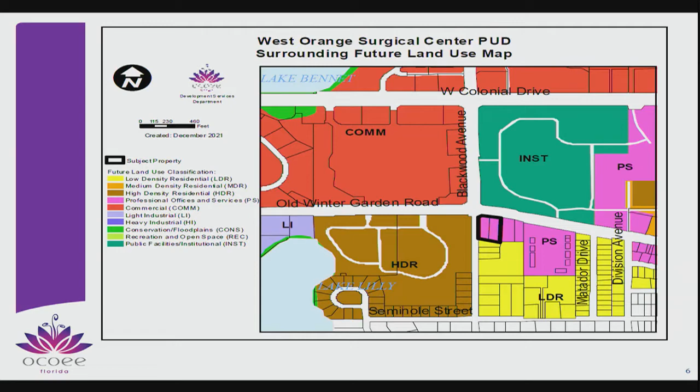In their land use plan, they're asking for a 15-foot building setback from Old Winter Garden Road, 10-foot building setback from Blackwood, 10-foot on the side, the east side, which they meet, and 25 in the rear, the south side. In terms of parking ratios, the requirement for medical is 1 per 100; they're asking for a little bit above that. Staff is supporting 1 per 250 square feet to mirror what was previously approved in the site to the immediate east.

Stormwater is being provided through a combination of surface retention as well as an exfiltration system currently being engineered. Landscaping will be provided along Old Winter Garden and Blackwood, the two fronts. On the south side for the residential, the comp plan requires a minor landscape buffer, essentially 10 feet plus landscaping and a wall or fencing. On the east side, I'll go into more detail in just a moment.

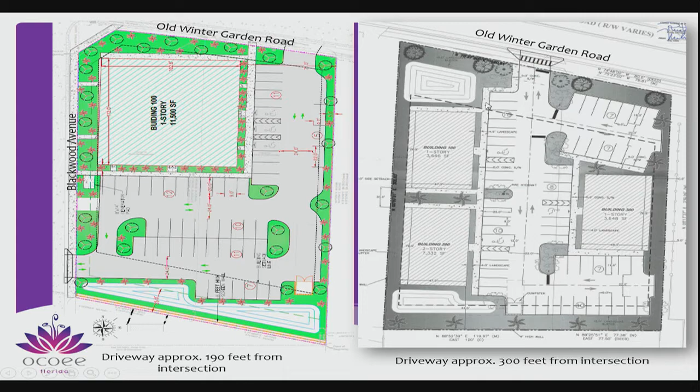Since the December 7th DRC meeting, I have to give my appreciation to both applicants for meeting with each other and talking over the past couple of weeks to come up with this concept plan, which hasn't been formally submitted as a revision but is in draft form that they've sent to us. The surgery center, this applicant, has agreed to modify their connection on the south, so there's a driveway connection here on the north and on the south. They will have full access off of Blackwood, and the two sites will have a shared driveway access off of Old Winter Garden. So the two sites combined are continuing to place the driveway connection, which is a right-in right-out because of an existing median, as far away from the intersection as possible to improve safety.

So the only other outstanding issues are really to finalize the cross-access easement, which they can do closer to final engineering, and then working out the sewer flows and connections with the utilities department.

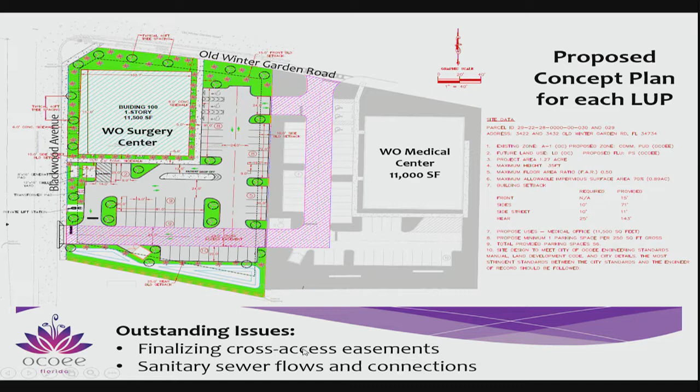So with the improvements that they've done to their site and land use plan, staff is recommending approval of the annexation and the rezoning from County A1 to City PUD for the properties located at 3422 and 3432 Old Winter Garden Road, subject to the two conditions again: developing a coordinated plan for access and circulation, and the resolution of all the outstanding utilities issues. With that, the applicant and the engineer are here to represent the project. If you have any questions of me or them, thank you.

Would the applicant want to come up here? No? Okay, does anybody here have any questions for the staff?

Just so I'm clear, because I think I may have either misread or misunderstood you, I've got a conflict. So the property to the east is another owner separate altogether. Are they going to come later and make the changes they're proposing, or are we doing that all in one? It's because two being separate is confusing to me. Two separate applicants, two separate projects, two separate owners.

It's just that the owners of the properties to the immediate east are coming to staff with a request for amending their land use plan that was already approved as well. So they're kind of coming in almost simultaneously with each other. We've been in conversations, we've had pre-application meetings with the properties to the immediate east. This property had a pre-application, and now they've actually submitted for their first round of reviews. We are anticipating the applicants for the property to the east, the existing medical center, to submit their application in the next week or so.

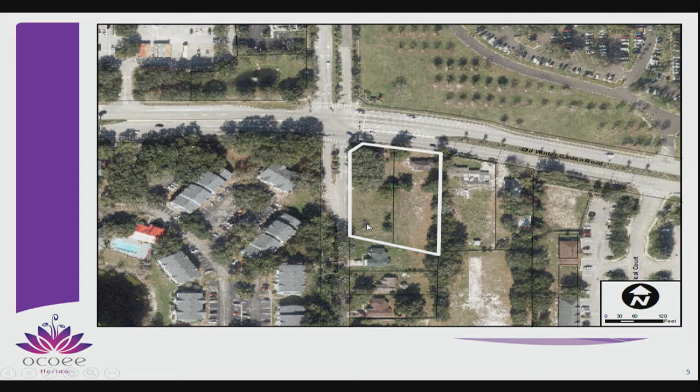Is this only going to be a landscape separation between the medical center and that house, or is there going to be like a fence? The comp plan requires a minor buffer, which is 10 feet, that's landscape plus wall or fence. So they could do wall or fence.

Are the separate parties, separate owners, related parties? I don't think so. Are the two owners related? I don't think so, no.

Any more questions for staff?

All right, with that being said, this is a public hearing. If there's anyone here who would like to speak about this item, here's your chance. Seeing none, I'm going to go ahead and close public comment, and two motions are going to be necessary.

Can I have a motion to either recommend or deny approval of annexation, please? So, Mr. Chair, I move that we recommend approval of the annexation AX 102122. Do I have a second? I'll second that. And then call the vote. Aye. All opposed? Motion passes.

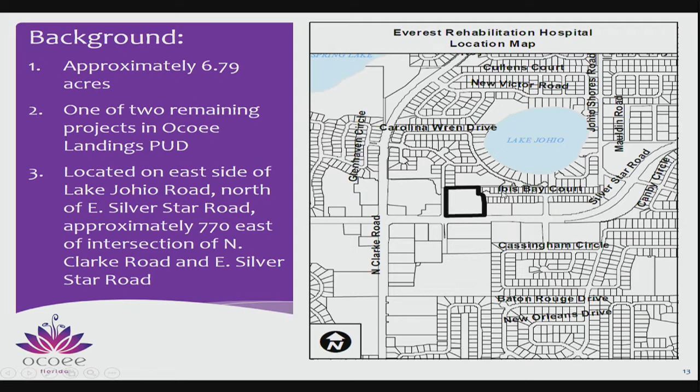You can see the single-family subdivision is totally built out, all 50 single-family homes. You have the Publix shopping center, Willows on the Lake. They have a gated access on this road, and you have Burger King and Citrus Elementary School across the road. This is the Dollar General, at the intersection to the subdivision and the intersection with Silver Bend.

As part of the construction of the single-family homes, DOT made them close an open median full access median, so it's direct lefts only. That was what they termed a short-term improvement, at such time they thought a signal would be warranted sometime in the near future. So at some point there'll be a signal at the Silver Bend entrance, just to the east from here. The property is all zoned commercial.

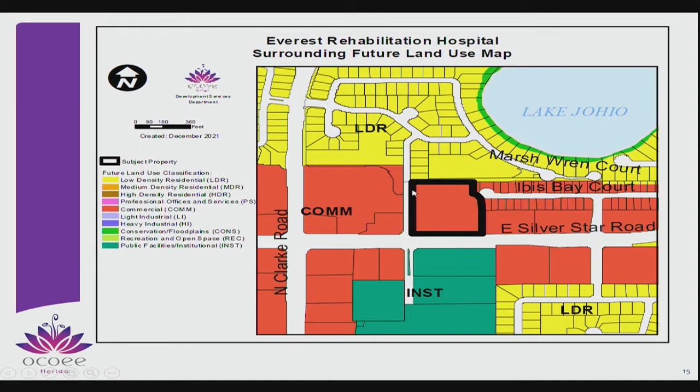It was done as a mixed-use plan unit development. The residences have access through the gate here, and they can walk through to go to this site or to the Publix. Sorry, that's a land use of commercial. The zoning is commercial plan unit development.

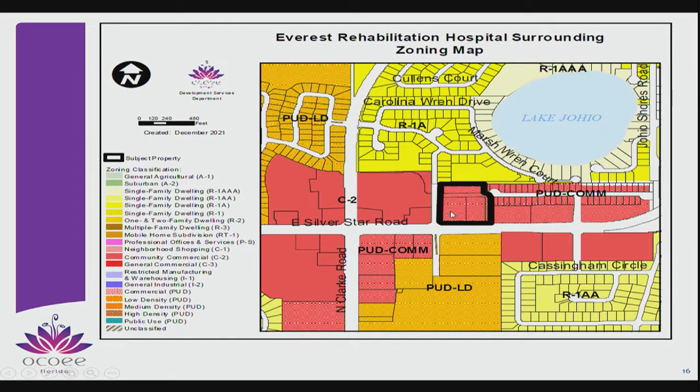Here's the overall PUD plan. They envision 4 lots, with a 4th lot here. The Everest is ending up taking the bulk of lot 1, 2, and 3, and this lot 4 will be remaining. So what's proposed is a 39,000 square foot, they call it Everest Rehabilitation Hospital. It's a rehabilitation center, a really unique concept, and they've got a footprint for an expansion of 4,000 square feet.

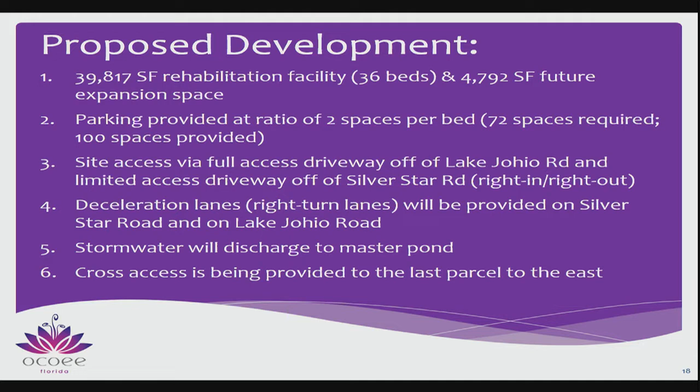There's parking provided. The site access is going to be a joint access with this remaining commercial parcel on the east side. Then they have a second access across from the most northern entrance on Lake Johio Road to the Publix shopping center. There'll be a right turn decel lane on Silver Star going into this access point.

At the Development Review Committee meeting, the day of it, they were proposing an additional right turn decel lane, as well as a right turn decel lane on Lake Johio. DOT does not want this right turn decel lane going onto Lake Johio Road. So as they finish those comments, that would be one change to the plan when it goes to commission, but they're still talking to DOT. We'll have a right turn decel lane on Lake Johio Road going into the subdivision, into the development.

The stormwater discharges into the master pond that was provided in the overall PUD. They have the little master pond. Actually, this property used to be an airstrip at one time, years and years ago.

There'll be cross-access provided - that's a good word, we got cross-access on the previous development, we're getting some more cross-access, limiting those driveways to the parcel to the east here. There'll be a cross-access easement to provide access to this parcel to the east. The existing subdivision has already constructed a brick wall, nice brick wall all the way down here, as part of the requirements of the PD. So that's already in place.

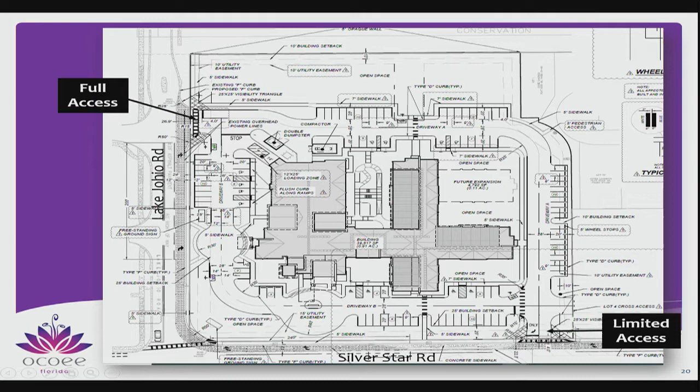The other main aspects of this, there's water and sewer at the site. The elevations don't really go to... if you can go to the Everest website, you'll see what the places look like. It's a lot of glass, a lot of moving light in there.

It's a really nice architectural feel to it. So this is moving forward as a preliminary because we still have some things that are unknown. We're hoping when we get to the city commission, it'll be a preliminary final. The final goes to the city commission as a consent. If we can catch the plans up, we'll present it to them as a preliminary final, but it's a preliminary at this step, public hearing.

The Development Review Committee has reviewed this. We have just some small comments on utilities, just how that line's going to run. It can be fully served by water and sewer from City of Ocoee. The capacity's there, and I'll entertain any questions. This was the site of the Firestone tire that got denied by the city. Are there any questions for the staff?

Just one, Mr. Chair. You were mentioning that it would have cross-access to the property to the east? Yes. I don't remember, has that property... No, it's still all vacant. Part of the PUD? It's all part of the PUD, it's a vacant lot. I am working with someone who has it under contract. I am working on a plan with them, as is the engineer. The engineer of record for this site was the planning and development engineer. We're working with a prospect on it, trying to get something to see if it can work. It would be large scale, over 25,000 square feet, so you might see something soon. We're not there yet, but we may get there.

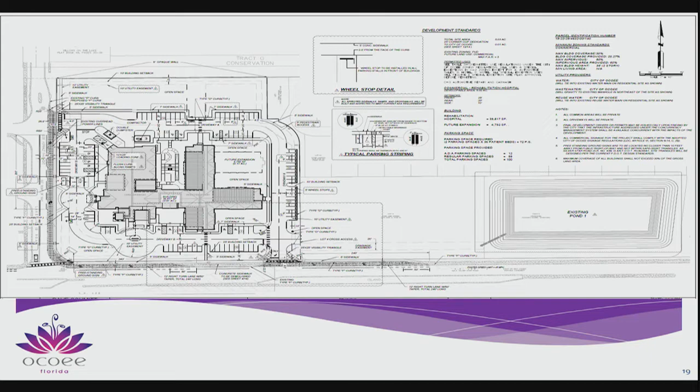The car repair shop and the car wash, I think, was before. I have a couple questions. The picture that you have, the vacant lots in the cul-de-sac, are they improved now? Yeah, all of the lots, all the single-family homes have been constructed.

And the wall goes all the way up? It goes this way, and goes all the way up to about here. What does it do at the top where the cul-de-sac is? It goes up and then it goes around the back. Okay, thank you. So I guess the one other question that I have then is, with that wall already there...

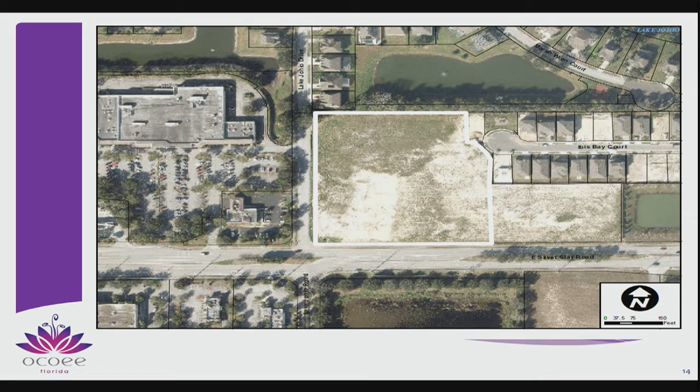What are they looking to do for the utilities to use that retention pond there for draining water? Because I guess I'm just trying to picture - so this subdivision has lines that go into this. This is going to go this way through a predetermined location to tie into the pond. So this lot will have the line that runs. I'll let Dave, the engineer, come up and speak to it better than me.

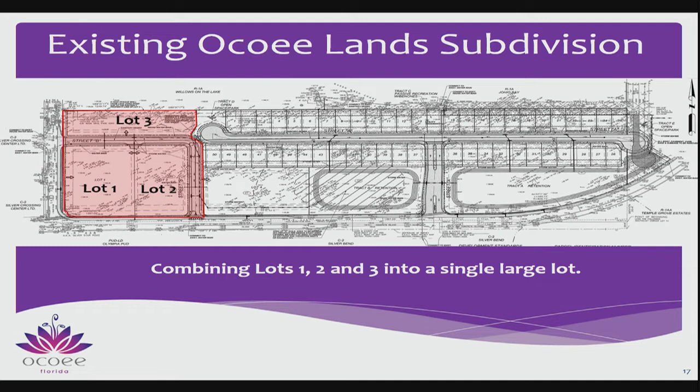Then I take it whoever builds on that lot 4 would have a drainage easement. We'll have a pipe through there. Yeah, it'll have a drainage easement.

All right, thank you. My question would be, how tall is this? I noticed there was like a high parapet on that building, and my question would really relate to the height and the sight lines to the northern community. Is it gonna be an eyesore? The maximum height in the commercial zoning, which this property was, but they just rezoned it PD commercial, is 45 feet. This is not even near 45 feet.

Any more questions? Or is the applicant here, and would the applicant like to speak?

And if you would, can you give your name and address, please? Sure. Dave Schmidt Engineering, 12301 Lake Underhill Road, Orlando, Florida, 32828.

I'm just here, we agree with staff's recommendation and here to answer any questions that you might have that Mike didn't already answer. Good job.

Do any members have any questions for the applicant? All right, well, hearing none, this is a public hearing. If there's anyone here who would like to speak about this project, now's your chance.

Did you fill out a form? If you could, fill out a form. I talked to them before the meeting, they just still wanted to attend, so they had some questions I answered before the meeting. Oh, they did, good. So we're good? Okay. Okay, to the right.

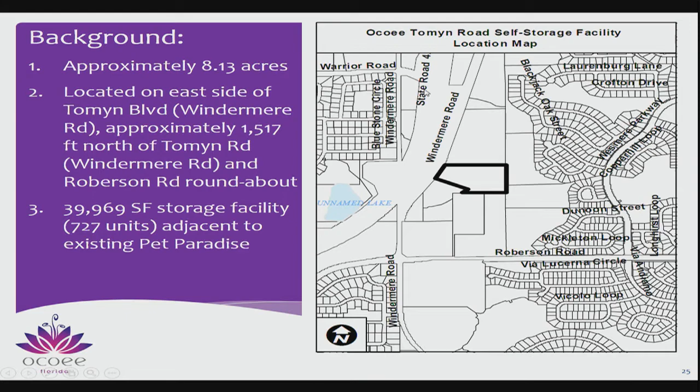Windermere really starts where the pond is here, but this map shows it as Windermere. You have Roberson Road, the roundabout, and State Road 429. You can see as part of the original parcel, this is remaining wetlands. You have wetlands, and you have wetlands, the pet paradise, and then the wetlands is part of this parcel.

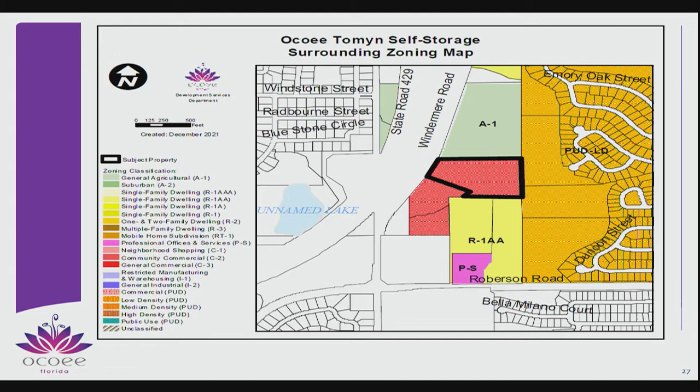It's a planned unit development. It was rezoned, a major amendment to the PUD zoning and land use plan to allow the indoor self-storage with a very specific requirement that they drive and unload indoors as well. And that's the site plan you're going to see before you today.

This is a snapshot showing how they're going to use a single entrance off Tomyn Boulevard, shared entrance into the PD. This is the pet paradise, the master stormwater pond for the site, and then we have the proposed self-storage facility, which is blown up here.

So as you come into the site, it's multiple stories, 39,969 square feet. You actually drive in and park and unload within the development. That was one of the

negotiations to move forward. The site was, going back to the original PD, it was envisioned as sort of a pet destination with a 24-hour vet, high-end, multiple pools, high-end doggy daycare, ancillary retail, some classroom space to kind of teach vet and business, and then retail.

And at the time we finally got this project approved, Commissioner Keller sat through some long meetings with the applicant, and he was bought out by VCA, Veterinary Centers of America. And VCA bought his practice, and he could no longer go forward under Barkeritaville, and he sold a part

to Pet Paradise, which he felt was, for Ocoee, he wanted to kind of stay consistent with a better user and not just a mom and pop. And then he retained the north end of the site, but tragically passed away. And so the sort of destination where everything worked together just wasn't being fulfilled.

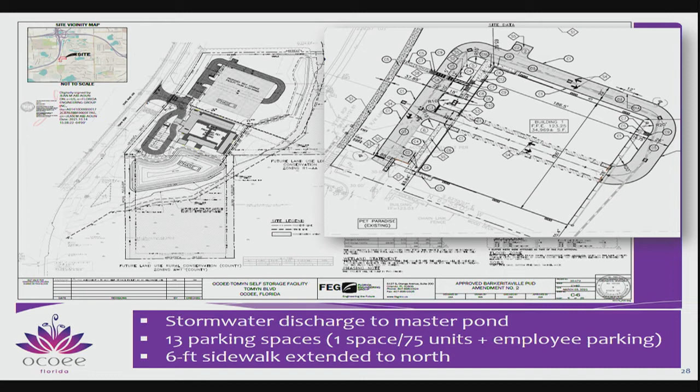And so we feel this is a good complement for the pet daycare. It's not a big driver of trips, and it will architecturally look cohesive with the color scheme and some of the elements. And the self-storage unloading is done inside the building, so it won't look like a self-storage building, but like an office building that doesn't have many workers. That was sort of the concept we went with.

They do have to modify the existing pond a little bit, but they're draining into the master stormwater pond. And this site helped get utilities to the area. We call this the Southwest Utility Area, and we didn't have water and sewer here. We have Araya, age-restricted apartments, a future ALF, and this site provided the opportunity to run sewer all the way down and around and connect it so we can service this area.

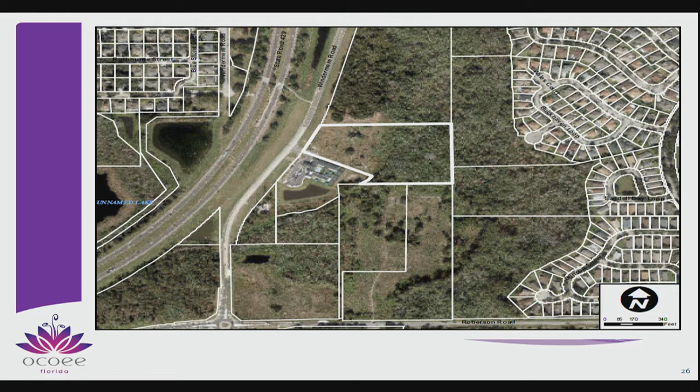The elevation, if you've seen the Pet Paradise, it's similar material, similar colors. It's going to, as much as it can, be architecturally cohesive, so when you're going by it looks like it's not just piecemeal. The engineer for this site is the engineer of record for the Pet Paradise and the Barkeritaville project from day one, and is very familiar with the site. So if you have any questions, we recommend approval.

Does anybody have any questions for staff? I think mine got answered ahead of time, but you covered mine as far as the moratorium. So yeah, I think we're good. Yes, it's like the third time I think it's come before us recently.

Now, would the applicant like to come up and speak for any reason? And if you could, can you give your name and address, please?

Good evening, I'm Bill Hawkins-Smith, Florida Engineering Group, 5127 South Orange Avenue, Orlando. I'm here to answer any questions you have.

Any questions? No, we've dealt with this project before. I agree with staff. I think if it's well back there, and there's a need for that back there on this side of town, I think a buffer of Windermere, Ocoee, and Winter Garden together there, it'll do well.